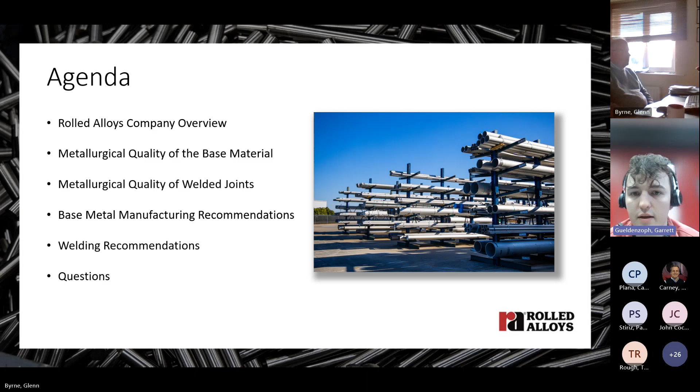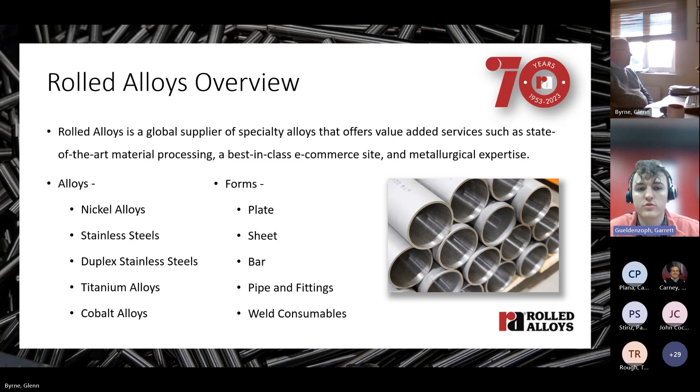Rolled Alloys overview. Here at Rolled Alloys, we are a global supplier of specialty alloys, and we also offer value-added services such as state-of-the-art material processing, an e-commerce site, and our metallurgical expertise. Our expertise lies within nickel alloys, stainless steels, titanium, and cobalt alloys. We also get into various product forms ranging from plate, sheet, bar, and other round products.

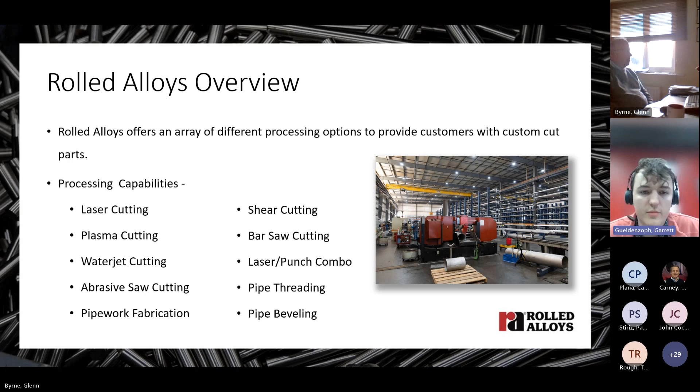Continuing on that Rolled Alloys overview, for our state-of-the-art processing, we offer laser, plasma, water jet, some bar saw cutting, and other types of fabrication or cutting that you might need. Our metallurgical services include a failure analysis lab. We provide knowledge and those laboratory services for our customers as a value-added service free of charge. We also offer technical assistance, laboratory services, lunch and learns, and also a sample inventory program.

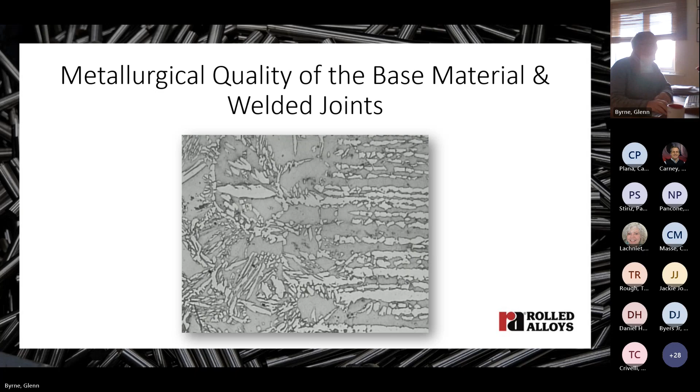Well, good morning, ladies and gentlemen. Today I'm going to be talking about metallurgical quality of the base materials and welded joints. Starting with the base materials, duplex stainless steels consist of two phases, ferrite and austenite, and they're in roughly equal proportions in the steel.

This image on the left here is the transverse section through a plate that's been polished and etched to show these two phases. The ferrite is the darker of the two phases, and the austenite is the lighter of the two phases. The austenite is relatively weak but very tough, and the ferrite is very strong but rather brittle. So by metallurgically engineering roughly equal proportions of each phase, you get the best combination of strength and toughness. Also, by alloying with enough chrome, moly, and nitrogen, you get good corrosion resistance. It's that combination of properties that make these steels so attractive.

But if something goes wrong in manufacture, third phases can be formed in the microstructure. If you look at this picture here, these dark particles that you see are the third phases that I'm referring to. They're called intermetallic particles, of which sigma phase is the most common. And these particles destroy both corrosion resistance and toughness.

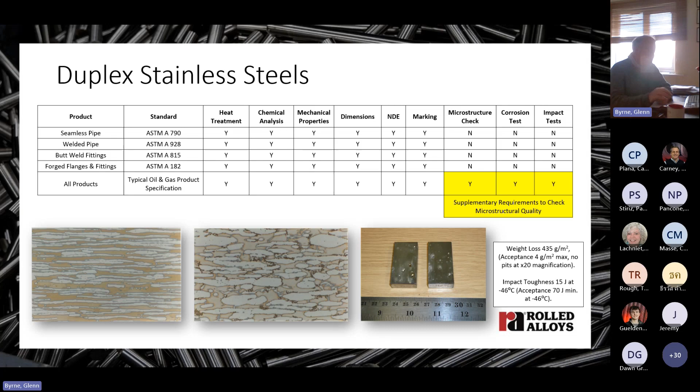It's our view that wrought and cast products that are to be further processed by welding should be certified as free from intermetallic phases at ×400 magnification by a competent metallographer, because items containing small amounts of sigma can quickly contain unacceptable levels of sigma when subjected to welding.

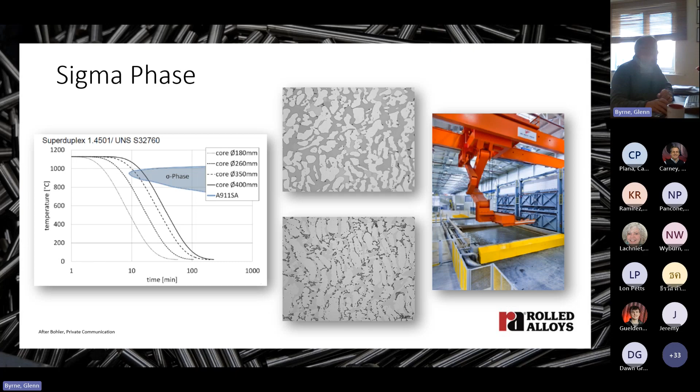Now, measurements using contact thermocouples in this particular case have shown that for parts in the middle of that basket, the proper soak temperatures and times are never achieved. The parts are heat treated in the temperature range where sigma forms and not where it dissolves.

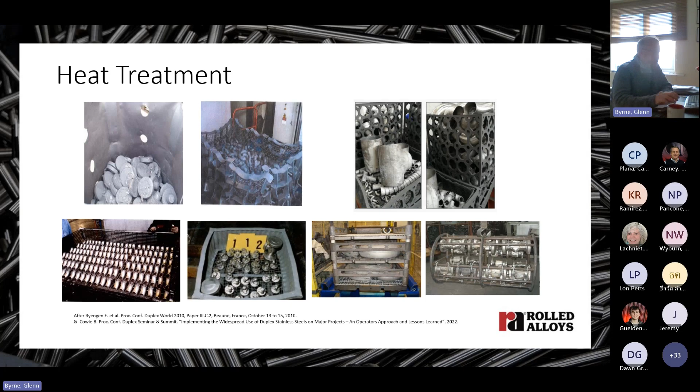Now, this demonstrates really that due diligence and the technical evaluation of a manufacturer's production capabilities and facilities is an essential step in vendor selection and securing quality of products. I'm afraid heat treatment and water quench is not necessarily the same thing to all men.

So moving on from this, as well as cast and batch testing that we've talked about, microstructure, corrosion and impact testing, it's possible to check individual parts.

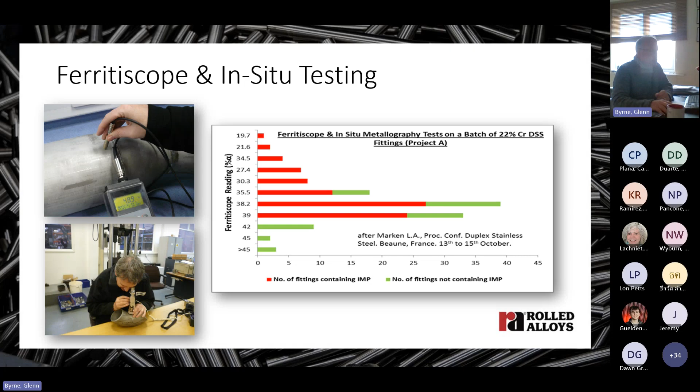Now, some oil companies specify Ferritiscope testing in addition to microstructure, corrosion and impact testing, and I consider that to be good practice. It's easier, less costly and less disruptive to do this and pick up any problems early rather than after fabrication installation, where this type of testing can be a painful experience, as you can see in this particular slide.

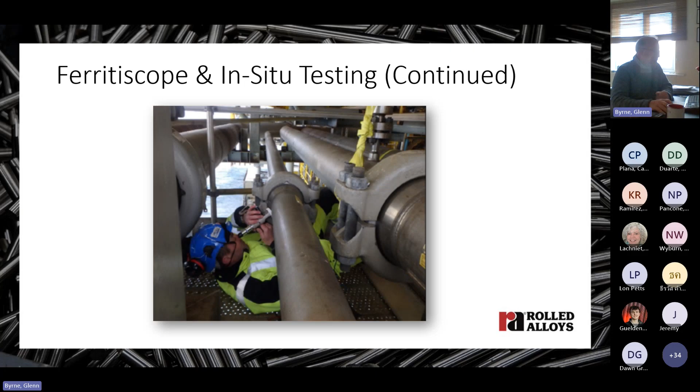So now let's talk a bit about welding related issues. I'm going to discuss nitrogen loss from the weld root, sigma in the weld metal, sigma in the low temperature heat affected zone, and secondary austenite in weld metals.

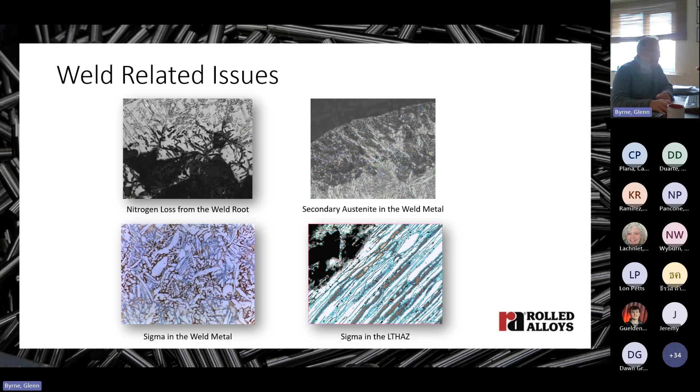Now, over-purging of the pipe bore causes nitrogen to diffuse out of the molten weld bead and into the pure argon backing gas. Now, nitrogen partitions to austenite preferentially in these alloys, so nitrogen loss lowers the corrosion resistance of austenite in the weld microstructure, and this causes the austenite phase to pit out during corrosion testing.

This is a section through a corrosion test coupon that's pitted, and we can see here that austenite is preferentially pitting out, and that's an indication that we've lost nitrogen during welding. And you'll recall that the multiplication factor is a factor of 16 for nitrogen in the PREN equation, so it's a very important element for corrosion resistance.

Now we can lose up to 20% nitrogen from the root run if we weld with argon shielding gases and argon backing gases in combination. The problem is resolved by not over-purging.

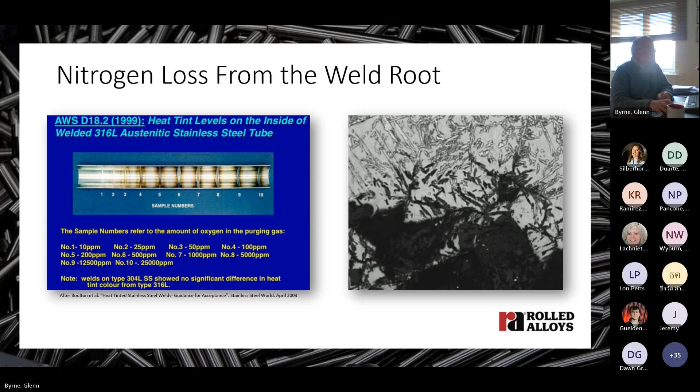Now, we can also get sigma in welds. It's possible to overheat the weld with excessive heat inputs and interpass temperatures and then form sigma phase in either the weld metal or low temperature heat affected zone, or both.

In the case of the low temperature heat affected zone of the pipe, the 850 to 900 degree isotherm is the location where sigma phase forms first and fastest, corresponding with the nose of the CCT curve shown earlier. Thin wall pipes with only two-dimensional heat flow tend to be more prone to this problem than thicker pipes. The issue is conducting heat of the weld thermal cycle away from the joint as quickly as possible to avoid the nose of that sigma phase transformation curve.

In multi-pass welding, you're continuously reheat treating, so the balance is to make the beads as big as possible without causing them to be sigmatized, and minimize the total number of weld passes and thermal cycles that take you up into the sigma sensitive temperature range. If you can do that, you have a really good chance of avoiding sigma.

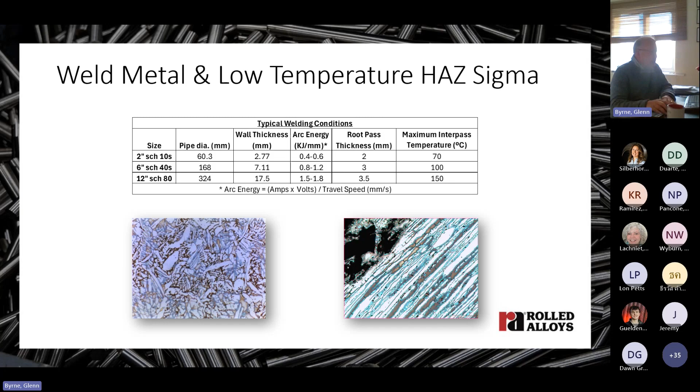Now we talk about secondary austenite in weld metal. We see preferential corrosion of secondary austenite or reformed austenite in welds. The cooling rates in welds are very fast, so a first pass of a weld can be very ferritic because the austenite hasn't had time to fully transform. Subsequent passes cause more austenite to form, but the cooling rates are again still high, and the elements in the steel can't diffuse into their preferred phase quickly enough, so the austenite can be quite lean.

Thermodynamic work has confirmed that secondary austenite formed below 1050 centigrade is lean in chromium and particularly nitrogen. So it has a lower PREN than primary austenite, and hence the corrosion resistance is poorer than primary austenite.

You can see in this micro here, these stringers of the white phase are primary austenite, and they're retained in the structure. These darker areas are where the secondary austenite has corroded in a ferric chloride test of a weld. So control of heat input and interpass temperature helps a lot to minimize this effect, but good welding technique helps too.

Welding parameters that give a substantial thickness of first pass, followed by a second pass with a heat input about 20% lower than the root run, avoids reheating of that part of the root that's exposed to the environment. That's here.

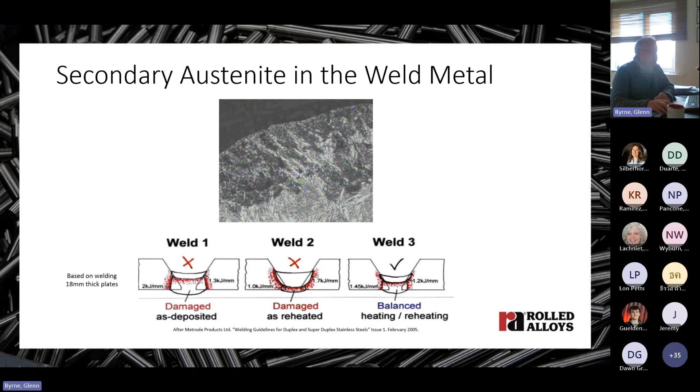Now, just a few words on weld procedure qualification. It's important to qualify weld procedures and welders as being capable of achieving the microstructural quality in the joints. Welding procedures are usually qualified to ASME 9, but like the ASTM standards, this omits corrosion tests, microstructure tests, and impact tests. So these tests need to be included as supplementary requirements to the fabrication specification to ensure that the welding parameters and welding techniques used are good.

We find that sigma phase formed by the fastest weld thermal cycles is not as detrimental as sigma phase formed isothermally in a furnace. Its size, shape and composition are not the same. So welds with small quantities of sigma phase can pass toughness and corrosion test requirements.

Unlike for raw products, when applying the microstructure check as part of a weld procedure qualification, we've been inclined to accept some visual evidence of sigma in the microstructure, provided the corrosion resistance and toughness testing passed and the microstructure of these samples was the same as that seen in the original microstructure check sample. And this is the position adopted in the ISO 17781 standard.

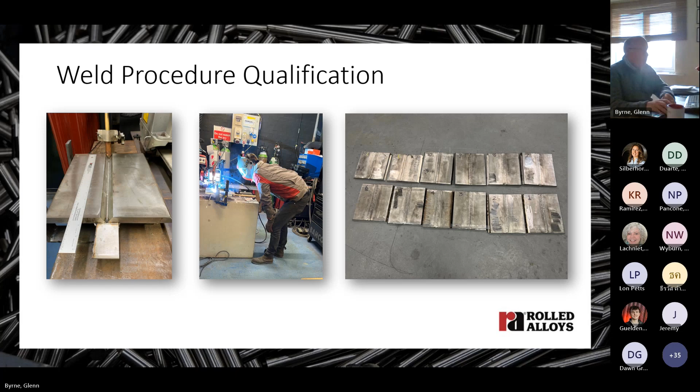So let's just review this with some recommendations in relation to base material manufacturing.

Use experienced suppliers or apply training and pre-production qualification with an appropriate level of production surveillance to new manufacturers. Use proven manufacturers with known heat treatment, quenching and pickling capabilities that suit the size range of the products being purchased. Some manufacturers have multiple furnaces, and not all of them are sufficiently good to give you the required heat treatment and quench properties of duplex stainless steels, so they need to use the proven and qualified routes, not other routes that aren't proven.

Apply ASTM product standards with supplementary microstructure, corrosion and impact testing to identify deleterious phases in the steel.

Apply Ferritiscope testing and in situ metallography to check individual parts, or some percentage of them, non-destructively. We've not mentioned this, but really apply PMI testing as well to avoid alloy mix-ups. All these stainless steels look pretty much the same, so you need to do that to make sure you're not mixing them up.

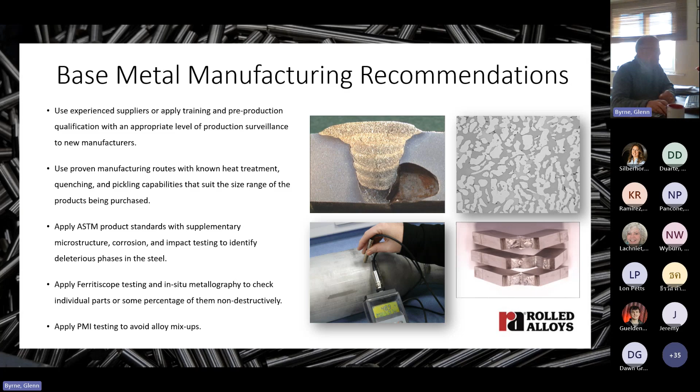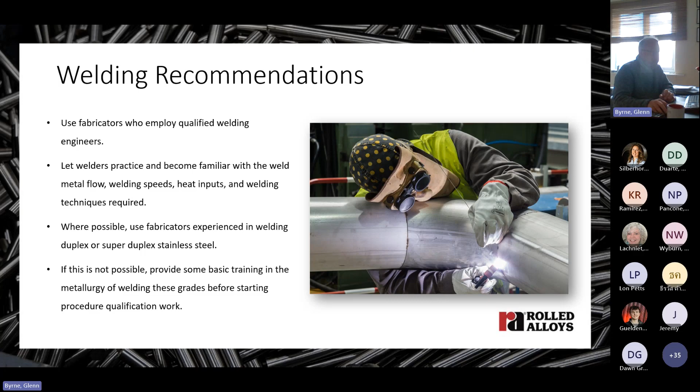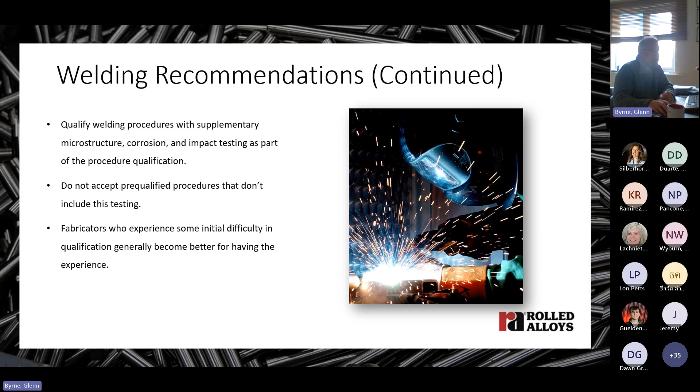Qualify welding procedures with supplementary microstructure, corrosion, and impact testing as part of the procedure qualification. Don't accept pre-qualified procedures that don't include this testing. I'd comment also that fabricators who experience some initial difficulty in qualification generally become better for having had that experience.